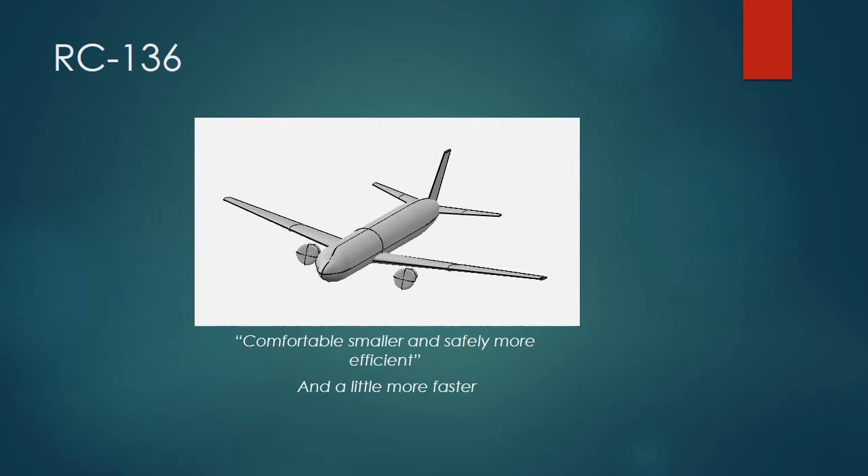Since our company is still in its infantile phase, I would like to take a moment to give a brief summary of how our company is structured. Despite having the workload separated into multiple different sub-teams, we've had many members flex their skills and dip their toes in different ponds. These members and their co-workers were the lifeblood of the RC-136.

Hello, my name is Kyle Spears, and I was the Aero team lead. After running an analysis on a variety of NACA airfoils along with the 707 airfoil as the baseline, the Aero team discovered the NACA 6409 airfoil to be the best fit for our design requirements. The requirements we were looking to fulfill included high lift, low drag, and a low moment to help our structures team.

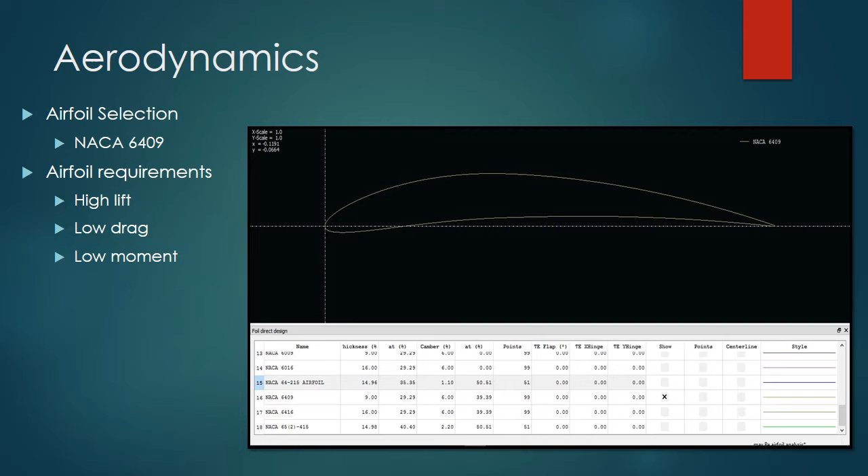The wing planform was designed to be similar to previous signal intelligence aircraft, with a wingspan of 130 feet, a wing area of 2,650 feet squared, and an aspect ratio of 6.375. After using XFLR5 at our cruise altitude of 50,000 feet and a fixed angle of attack, we found our wing coefficient of lift to be 0.980 and a coefficient of drag to be 0.292.

For high lift devices, our team decided to incorporate slats and double slotted flaps onto the wing of our aircraft. These are needed to achieve our CL max of 1.8.

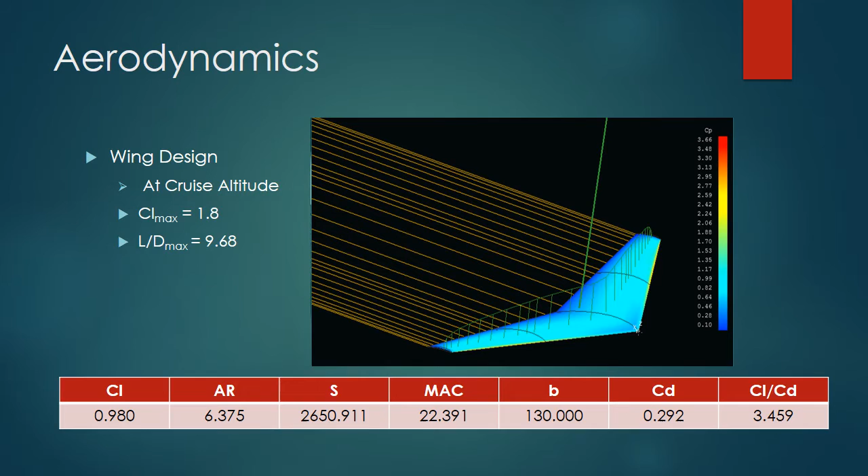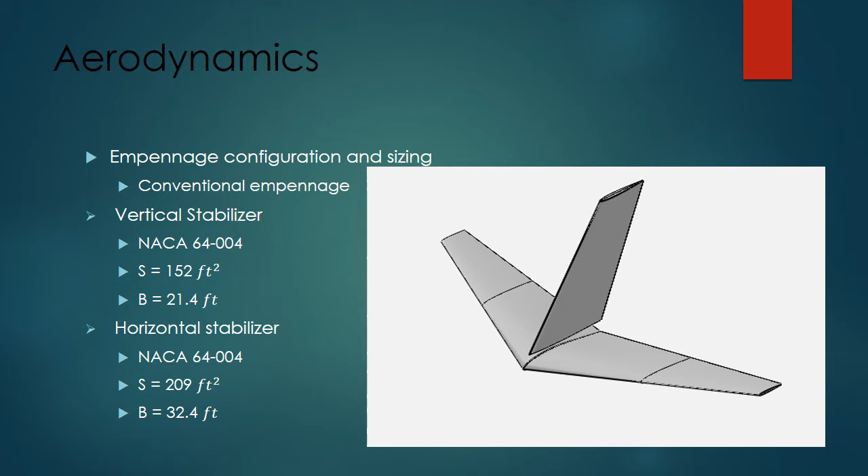The conventional empennage configuration was chosen for our aircraft because of the wing configuration and engine placement. Sizing of the vertical and horizontal stabilizer was completed using a stabilizer spreadsheet provided by a well-renowned professor at Oklahoma State University. The sizing and location from the wing were maximized from a stability standpoint.

The first decision we had to make as a team was where we would like to place our engines and how many engines we would like to have, keeping in mind we would like to reduce the weight of the aircraft and be able to handle the N/2 engine out scenario from the RFP.

We looked at fuselage mounted engines and wing mounted engines, also inboard versus outboard, and whether we would like 2 engines or to keep the 4 from the original RC-135 design. We ended up choosing 2 engines to reduce the weight and going with an engine that had a higher thrust rating and efficiency, and we would like to keep them mounted below the wings.

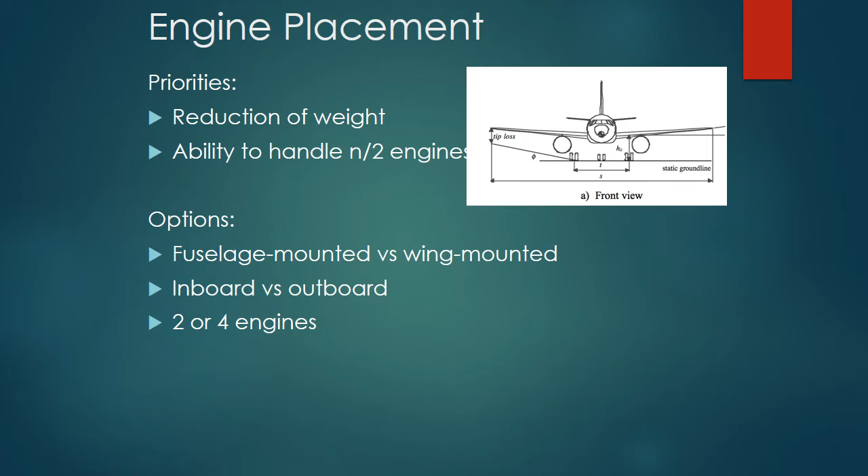Now that we know how many engines we need and where we would like to place them, we can pick an exact engine that fulfills our design requirements. We started looking at cargo engines and the CFM56 series, which they currently use on the RC-135.

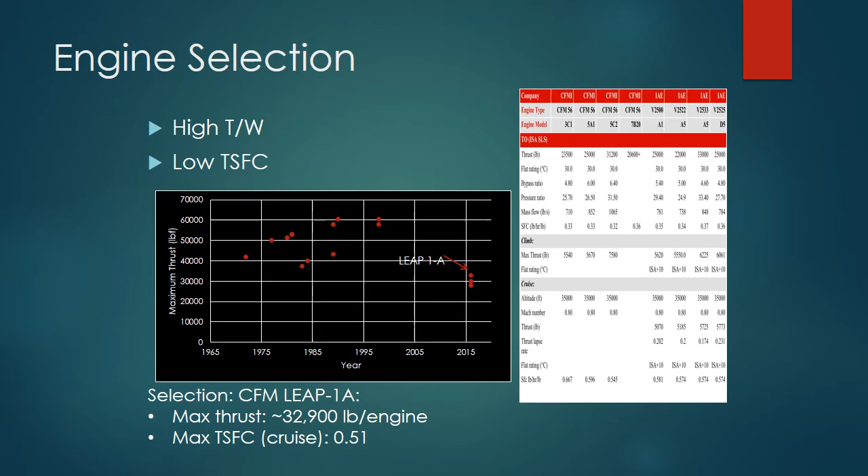We looked up some thrust-specific fuel consumption data and kept in mind that the CFM LEAP engines that are now coming out promise a 15% increase in efficiency over the CFM56. We extrapolated that data and with the efficiency increase found that our worst case scenario thrust-specific fuel consumption will be about 0.51, and the LEAP 1A will give us a very high thrust rating of 32,900 pounds of thrust per engine, which gives us about 65,000 pounds of thrust for our 2 engines.

Now that we have orientation, number of engines, and engine type selected, we can see how well that serves our design. As far as requirements that we've met or exceeded, our time to climb is 16.3 minutes, takeoff distance of 7,900 feet, landing distance 4,000 feet, both of which do not exceed our maximum 9,000 foot requirement for the RFP.

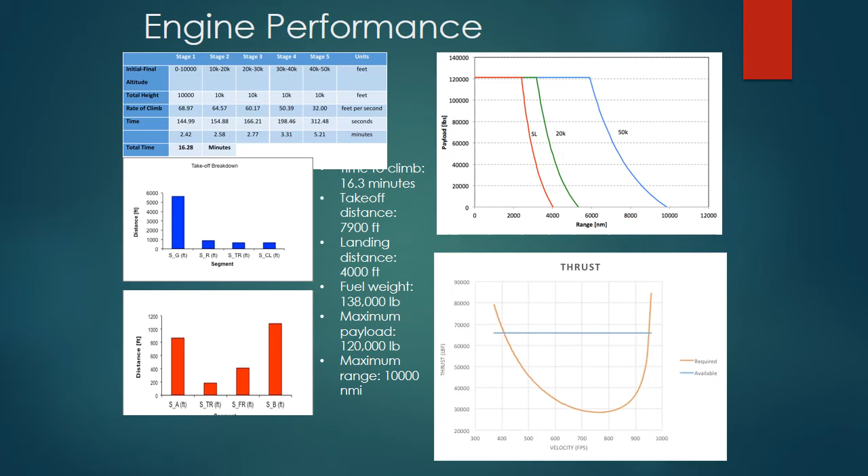Our fuel weight is 138,000 pounds, maximum payload of 120,000 pounds, and a maximum range of 10,000 nautical miles.

For structures, we'll start out by talking about the different materials that we used or that we will use. We analyzed the most common materials in aircrafts, as well as different composite materials such as carbon fiber and Kevlar.

We looked at two different types of aluminum, the 2024 aluminum and the 7075 aluminum. The 7075 aluminum has a much higher yield strength and ultimate strength with a slightly less Young's modulus. The 7075 is also a little bit cheaper. With that in mind, we decided to go with the 7075 T6 aluminum as the material of choice for the majority of the plane.

We'll use that on things such as the skin and wing spars. With composites being high strength, low weight, and relatively low cost, we're going to use carbon fiber for the ribs of the fuselage and the ribs of the wings. This is going to give us a reduced overall weight of the aircraft and allow for more efficient flight. We plan on using both of these materials in unison to provide a strong, lightweight structure.

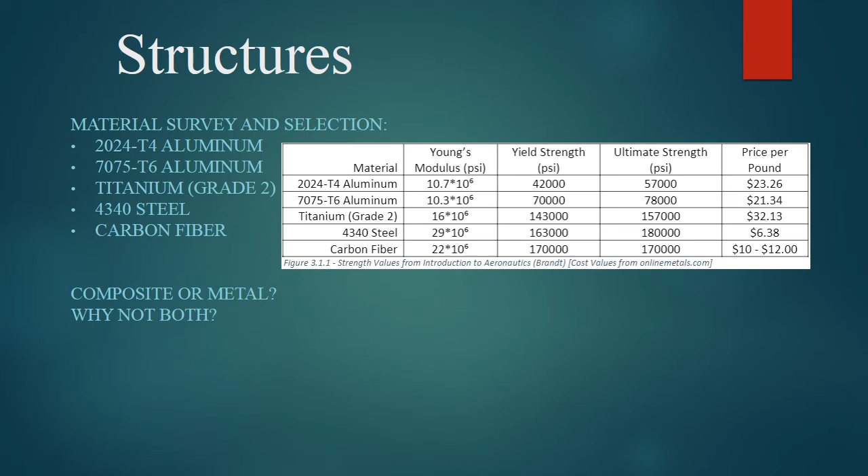For the load analysis of the aircraft, we have wing loading and fuselage loading. The wing load is about 340,000 pounds of loading due to lift. The wing load distribution follows a normal elliptical pattern with the max lift location at about 35% of the wing. We also have a maximum moment of 1,750,000 foot-pounds at the wing root.

With the fuselage loading, the tail will be required to produce about 19,000 pounds of lift to counteract the moment. We have a static margin of about 0.2, which will give us a steady and level flight. For the landing gear, we're just going to use a traditional dual-wheel tricycle configuration, putting a gear on both wings as well as the nose.

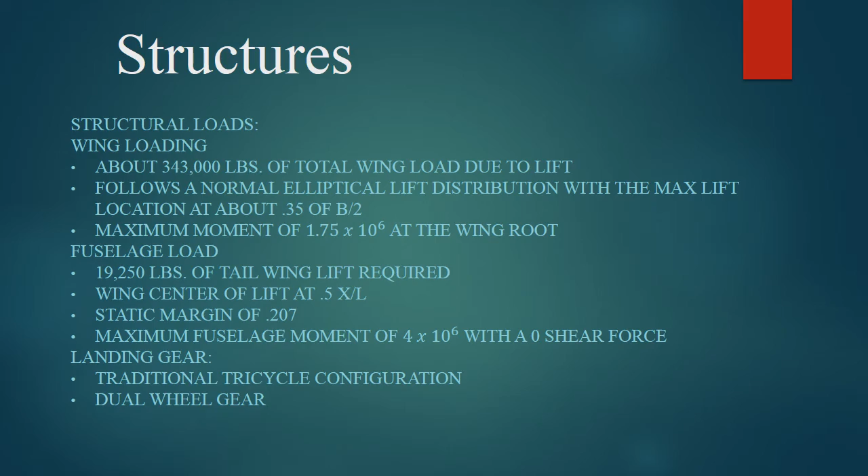As far as the cockpit layout and the avionic systems on board our aircraft, we went with a glass cockpit configuration. This is similar to what can be seen in the A380 today. It's going to have 8 LCD screens, and on these screens it's going to show information from the engines, including temperature, RPMs. It's going to show weather. It's going to show everything that the pilots would need to really safely operate the aircraft.

Backup instruments are going to be incorporated into this design in case there is an electrical blackout in the cockpit. It's going to be arranged in a common T configuration, which can be seen in the lower right hand corner of the screen. And then for the avionic systems on board our aircraft, it's going to consist of a whole lot of things, but key ones I'd like to hit on are the internal navigation system, automatic flight control system, and flight management system. All these things work together to really make the aircraft operate as we would like it to.

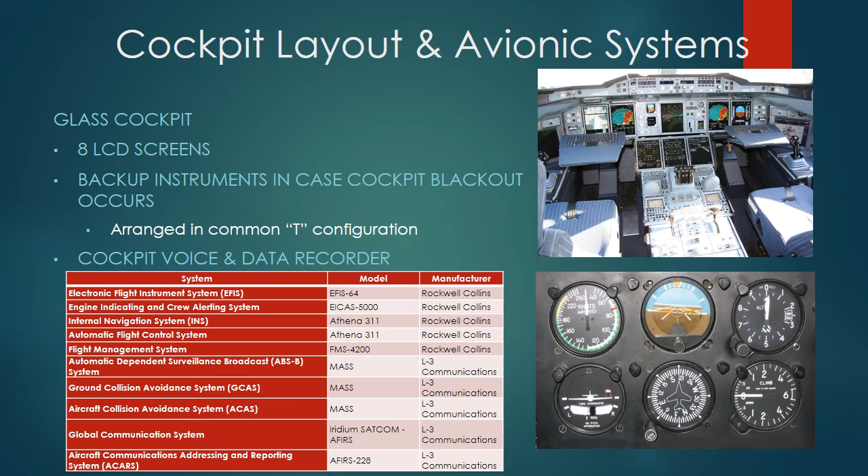We went with the fly-by-light control system. This is preferred over fly-by-wire due to the electromagnetic sensors that are going to be operating on board our aircraft. Compared to hydraulic and mechanical systems, it's a huge reduction in weight, which allows us to carry more payload. What this does is take the pilot's input from the yoke, transmit it through fiber optic cables, and then once that signal hits the servos for the elevators, rudders, and ailerons, it moves them how the pilot wants.

For the component layout, our avionic systems are going to be held towards the front of the plane. Fuel is going to be mostly in our wings. We're going to have modular computers along the starboard side of the aircraft, and then there's going to be 20 payload operators sitting opposite those computers.

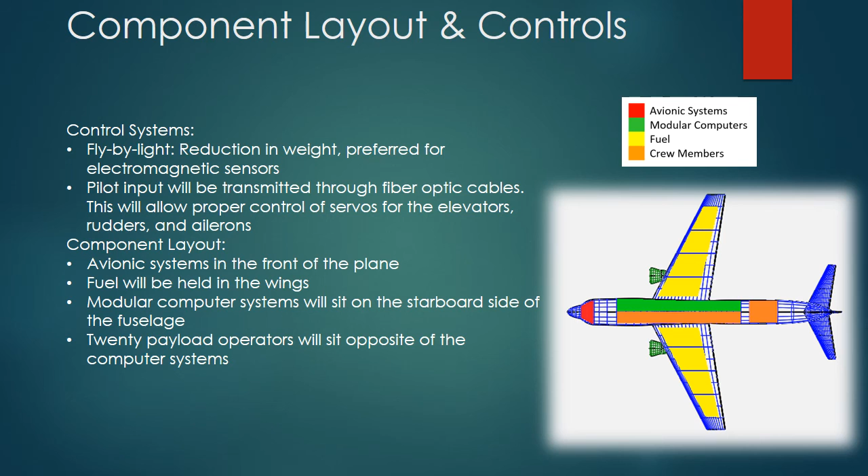Despite the constant repairs and upgrades, the United States RC-135 airframes are showing their age. Spare parts are no longer manufactured, causing ground teams to improvise once the parts run out. The time has come for this aircraft to be replaced.

Due to its modular payload capabilities, the aircraft will excel in other applications such as maritime patrol, weather monitoring, and cargo transportation.